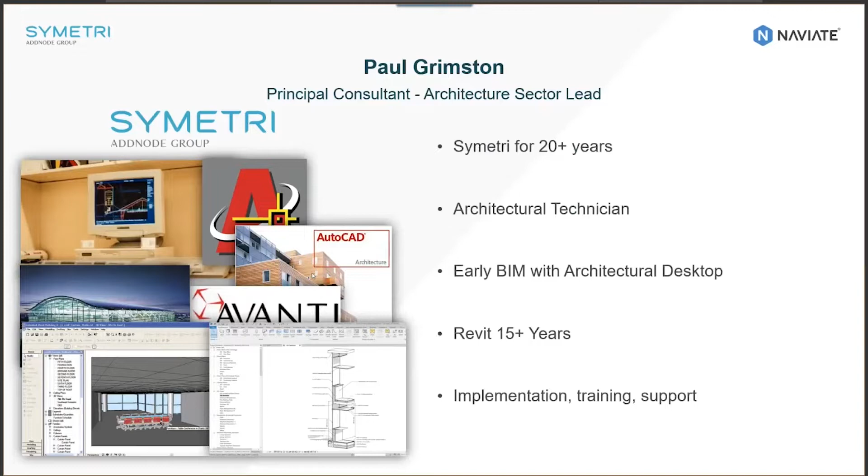The first area is everyday tasks, things that are just a little bit frustrating at times. Sometimes it's selecting objects or finding the right object on a complex project, trying to find the right family in the office library, searching through folders. That can take a bit of time - you know it's there, but just can't quite find it.

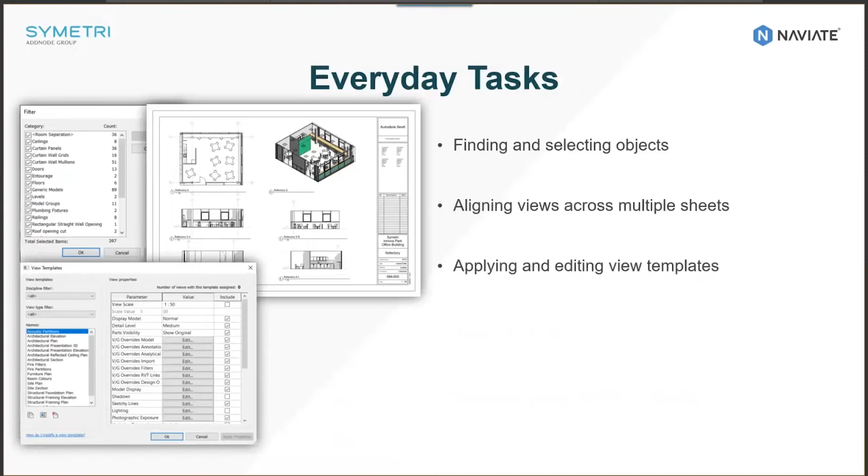There's other things like making drawings look presentable and consistent. We need to get views aligned across sheets so that they don't do that little jiggle thing in the PDF when you scroll through it. That's quite annoying. And things like assigning the right view templates - there's always hundreds of them in the projects, adjusting 3D sections, that sort of thing. These things can sometimes just be a little bit harder than they should be.

Some projects are just a bit complicated, and when you're doing this all day, every day, it can be a bit frustrating. Finding the best way to carry out these tasks can make a real difference to your everyday workload. If you can make it feel easier and give yourself more time for the things you actually want to be doing - designing and issuing the drawings - then it's really worthwhile investigating the options there.

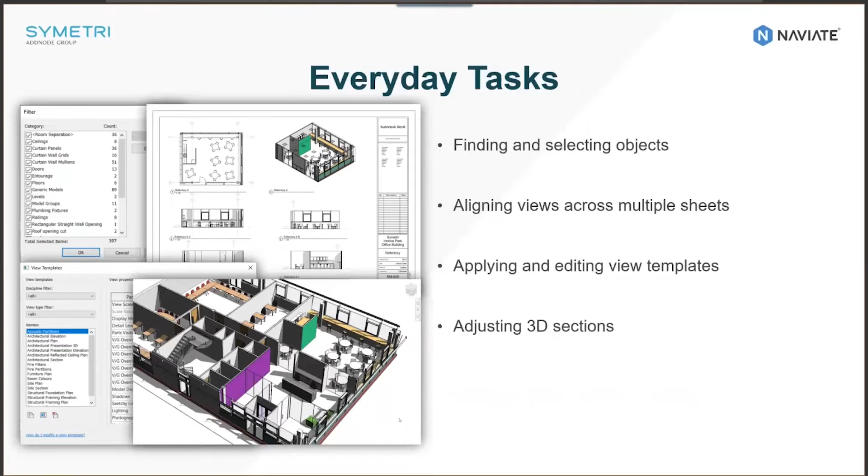The next group of challenges are things carried out on a regular basis, maybe weekly or fortnightly. The obvious one is issuing a set of drawings - having to go through each sheet individually and edit those revisions, ticking the box to make sure you've got the right one, the next one in the sequence, can be a bit time consuming.

One thing that has changed recently is printing sheets to PDFs with all of the correct naming convention - that has been improved in Revit 22 and onwards. But if you have to issue DWGs, Navisworks, IFCs too, that can take some time. And if you're still working on projects in Revit 21 and earlier, you're still spending a long time issuing those drawings.

When we do that, chances are we need to export out the model as well. Do we need to detach it, delete all of the views, all of the sheets, purge it? This is going to take some time, especially if there's multiple models that make up a project - that's going to take a while to go through them all. And all of this stuff always seems to be on a Friday afternoon. So having that workflow to fall back on, to know you're doing it the most efficient way, whether that means a Dynamo script for specific tasks or a plugin, can be a worthwhile investment.

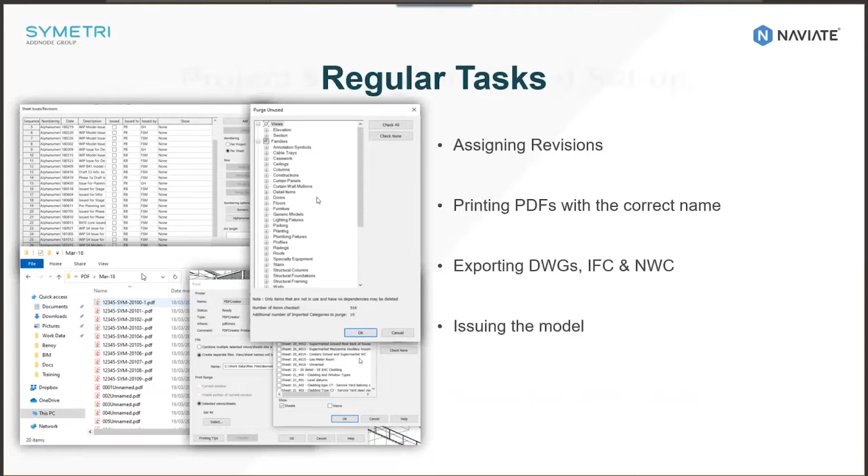The third type of issues are the project management and setup issues, and these things are a little bit more specific - there might only be certain people in the office that know how to do these things. We're thinking about controlling all of those view filters and setting up the view templates, going through all of the warnings - there's hundreds, if not thousands, that seem to creep into the projects - making sure we've got all of the right parameters set up there, all of the schedules are working.

This leads us on to things like numbering sequences. The first time you issue your door schedule or your room schedule, you're going to have to go through and renumber all of those objects. And if you need to combine levels and zones into the numbers, it's going to take a while to get through all of that.

Another one that I often get asked about is fill patterns - can we create a custom fill pattern for a specific material? This is always something that I feel like I have to relearn every time I need to do it.

We don't really expect every Revit user to be able to do these things. Not everyone wants to be an expert in Revit. There's normally a go-to person in a company that will sort this thing out, might even be you guys listening on the session today. It can be quite time consuming, a bit of a pain sometimes when you have to go through this.

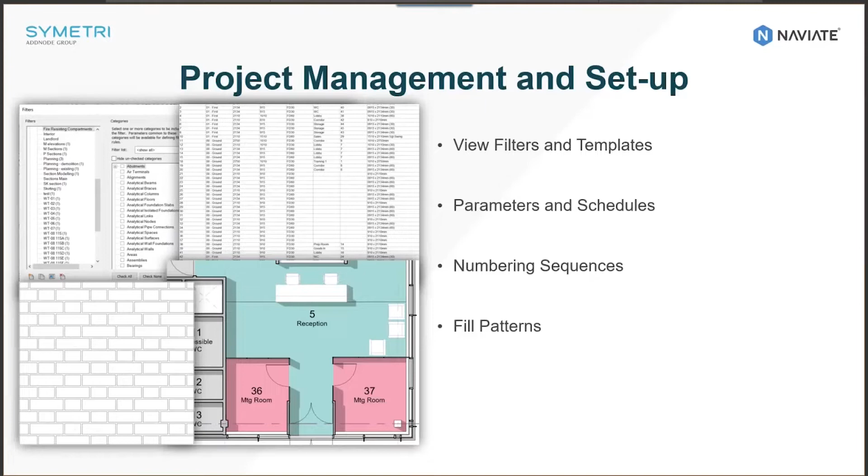And finally, we've got some bigger issues. These are the kind of workflow challenges, and these can almost stop projects from being viable at times, really.

We see a lot of residential work going on at the moment, blocks of apartments, and likelihood is you need to create a plan for each apartment in there. So you need to create a view, duplicate a view, edit the crop region so it fits around just that one apartment, get it all named, and put it on its own sheet, which again needs to be created and named. All these things aren't difficult to do, but if you've got hundreds of them, it could take days to go through.

It might be similar in education or healthcare projects. If you need to do room drawings, you're going to have at least 4 elevations, a plan, maybe a 3D view as well, and you probably want to put a schedule on there. And chances are, in a big healthcare or educational project, there could be thousands of rooms. That's a real nightmare when someone has to make a start on all of those drawings.

Other detailed bits - we see door and window drawings a lot, where we want that detailed elevation plan that we can put in with the door schedule, and there can be hundreds of those to go through, each one an individual little drawing that you've got to make up.

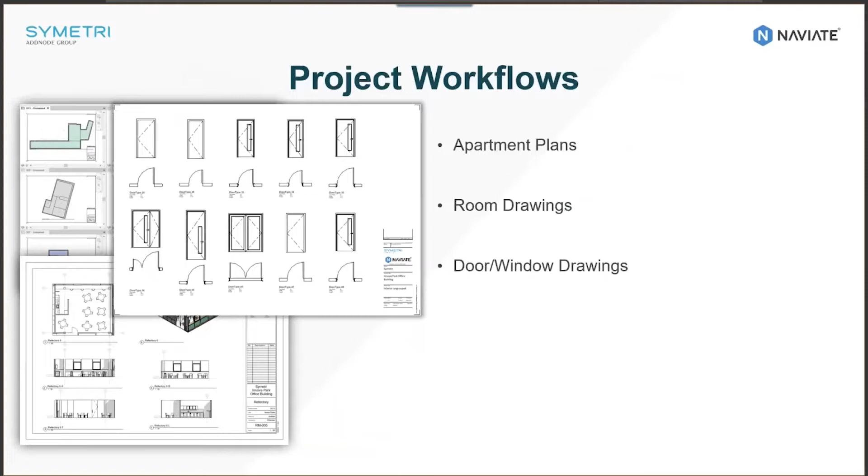Actually, what we're seeing a lot over the last few years has been a noticeable increase in the request to help organize data within models. COBie has become a really common deliverable, but also Uniclass coding, using SFG codes for asset management, and data for embodied carbon calculations is a common theme as well now.

Whilst there might be specific tools to help organize all of this, checking that it's all done correctly, that the parameters are filled in with the correct naming, or having to combine different parameters together to get the right syntax - that can really take a long time on a project. You really do need an easy way of managing that data and all of those parameters, and actually having a visual way to check that data makes it a much easier thing to do.

These kinds of tasks can be quite crucial to a project. They're a big overhead as well, so there may not be an easy way to carry out some of these things in Revit. You may be thinking that someone's just going to have to sit there and plow through it all - it may take days, if not weeks, going through it.

So therefore, getting a custom script or an app written could well be worth the investment if it's something you do regularly. Actually, this is kind of where my role comes in. I've worked with numerous clients going through these kinds of challenges, and everyone comes at it from a slightly different angle - they've all got their own requirements, so it's always interesting to see how we can work through the problems to suit that specific client.

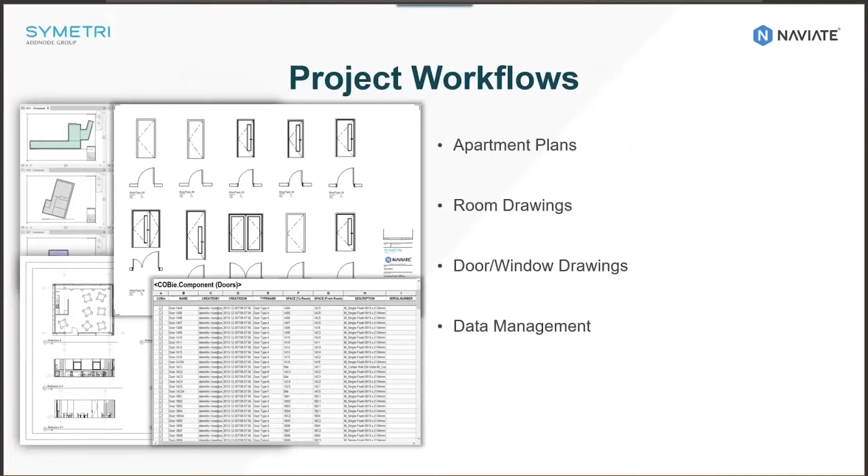It's got over 100 tools in there, actually, in the Accelerate and architecture ones that we're looking at, and they're all created from a need. They're there to help us work smarter in Revit, and it can have a big impact on the challenges that we face.

Seeing how a lot of these tools can be applied in combination to different workflows, it becomes a very powerful set of tools that we've got here, and could alleviate a huge amount of frustration in day-to-day tasks, but also in some of the bigger workflows. It could make some of those projects a bit more viable again.

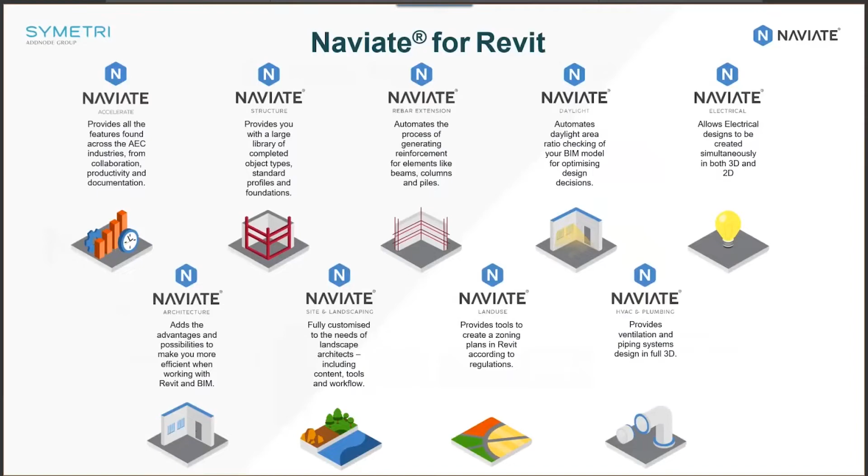So I'm not going to do a live presentation. I want to play this video, which I've been prepping over the last couple of weeks, and I'm going to talk over that and explain a little bit about what Naviate can do.

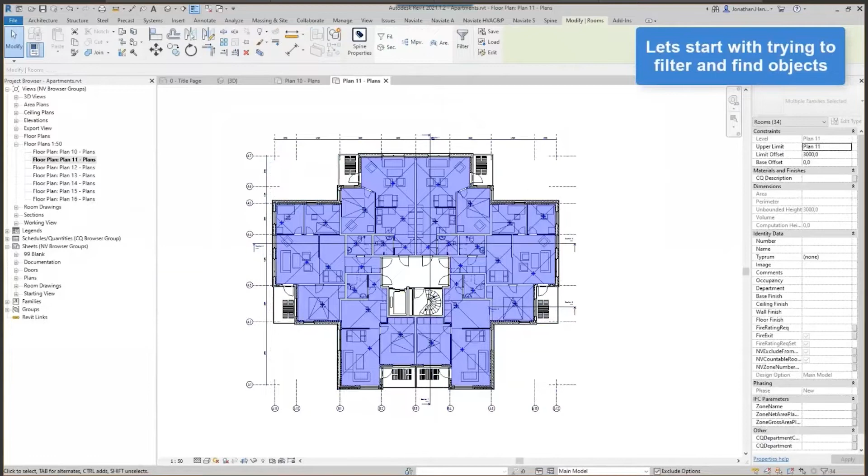We're going to look at some everyday tasks within Revit, and even things as simple as filtering in Revit sometimes are painful. You can see here in the example, I'm trying to filter by rooms, but I can only select the rooms as a category - I can't really filter in any more depth. But within Naviate, we've got a filter element tool, and this allows you to drill that little bit deeper when you need it.

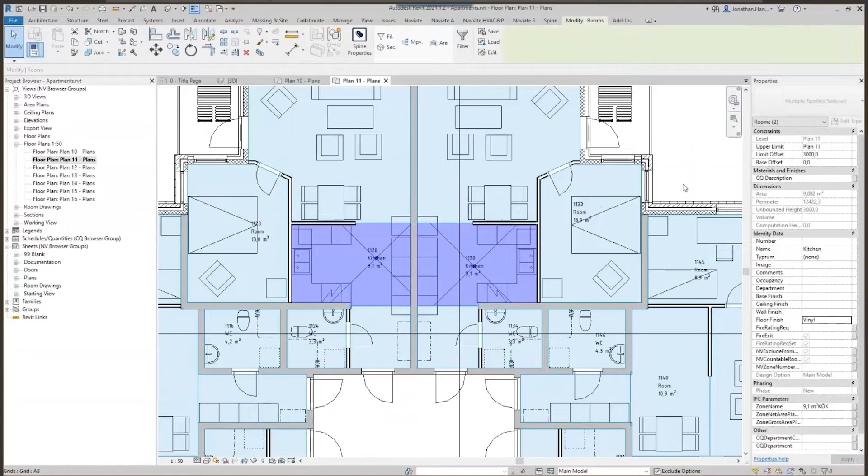So we can still select by category, but as soon as I select a category, I can also select the individual rooms. Once you have that, you can just click select elements. I've quickly gone into my model and selected and updated that piece of information within this instance, selected my kitchen, quickly applied a floor finish, and done that without actually selecting physical objects within the model. So it just makes it a little more streamlined.

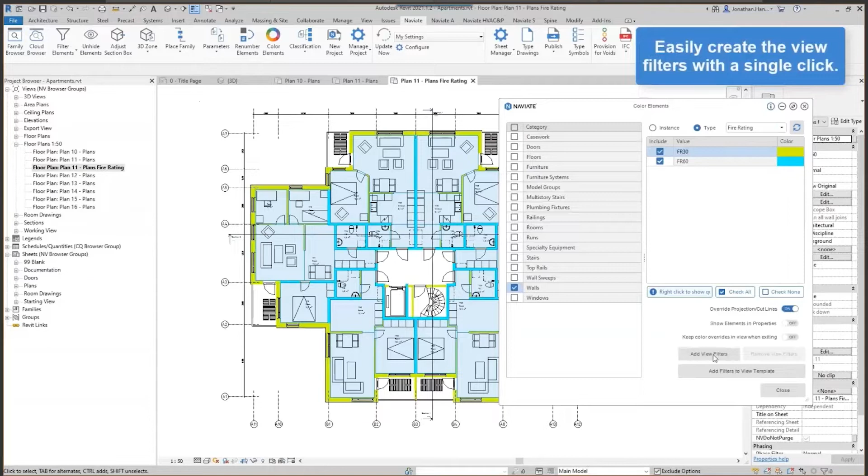One of our big tools is our color element tool. We use this to create things like fire rated floor plans. Here I can select a category, automatically select a parameter, and it builds the color scheme automatically for me. Then I've got options within the tool to create view filters. Just at the click of a button, I've gone in and created the view filters, so when I check my visibility graphics, you'll see the filters are now automatically configured and built within it. As Paul mentioned, these repetitive tasks aren't hard to do in Revit, but if you're doing them over and over again, it gets quite time consuming.

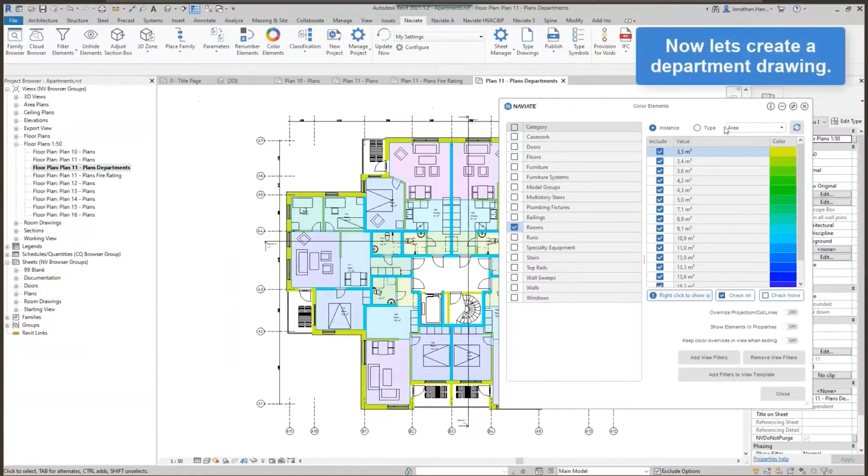Here I'm going to look at creating a departmental plan, which is often part of your deliverables. Again, I'll use the color element tool, look for the rooms, select the drop down and choose a department. You can see it already builds the color scheme. Again, I select and add the view filter, it filters it out, and then you can go into visibility graphics, and with the new controls in Revit from the last couple of years, you can enable and disable the filters. Within a couple of clicks, I've been able to build that directly.

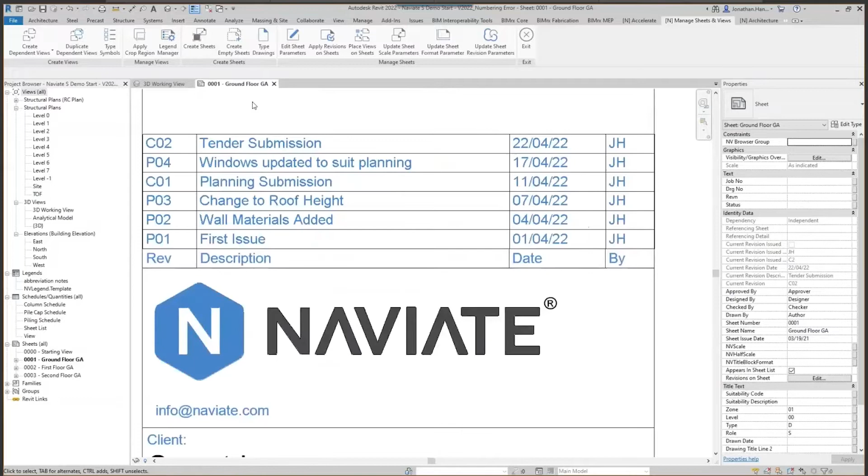As Paul mentioned in his presentation around revisions, this has always been problematic and very time consuming within Revit, since you have to apply a revision singly on each sheet. But within Naviate, I can select a range of sheets and apply a revision automatically to all of them at a single time. Here you can see I've added the P01 first issue, but I can go back in, select all my sheets again, select add revisions, and pick all the other revisions as necessary within my project. Here I'm applying 6 revisions to 3 sheets in a matter of seconds, so it really brings that speed element. On 5 or 6 sheets it's not a problem, but if you've got 100 sheets, it becomes a lot more time consuming.

Another thing Paul touched on was publishing, and yes it is improving in the latter versions of Revit, but still needs a little work. Within the Naviate tool, I can publish out to DWG, and I can configure naming conventions. Here I've got a sheet set already preset with a naming convention, and I've done this manually to show you how quickly I can configure the actual 19650 naming convention string I want to name my file, just going through picking my parameters that already exist within my project.

I add in the originator, then go to the zone, choose that and build it the way I want. I click in the level, and it's simply a case of picking your parameters and building that convention—it doesn't have to be 19650, if you've got your own independent one you can build it too. So you select the parameters you need, build them in, and on the right hand side I can add prefixes and suffixes. Once we've got the role, we add the sheet number, then add the hyphen that separates the naming convention, click OK, and it's built.

So now if I export the drawings out based on the sheet set, they'll have the correct file naming convention appended to it. Here I'm creating a catalog entry, so I can save this into the project, or save it from my settings, and we can also add in an IFC. So if you want to create an IFC export, you can configure that as well.

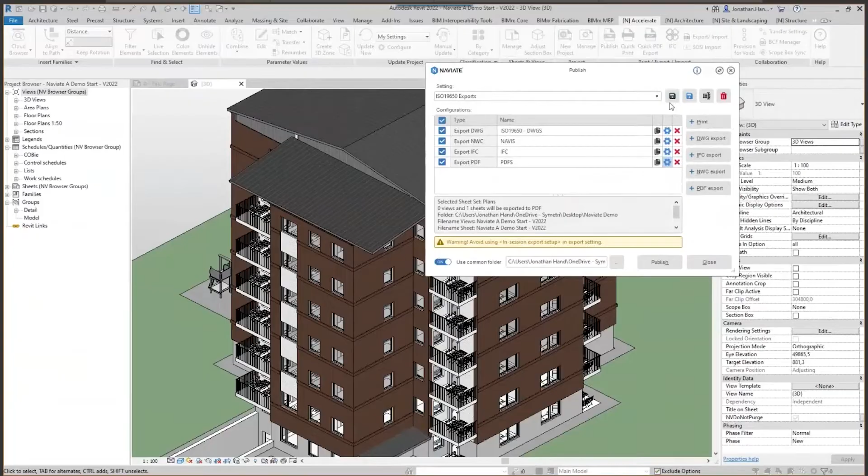One nice thing we can do is also use a common folder, so we can override the individual configuration folder location. So we can set a project location, and then you click publish, and then everything runs through the print publish routines and sends out the different drawings.

When we start looking at the challenges Paul discussed around managing projects and updating the data within it, we've got a renumber tool, which is really useful to renumber different elements.

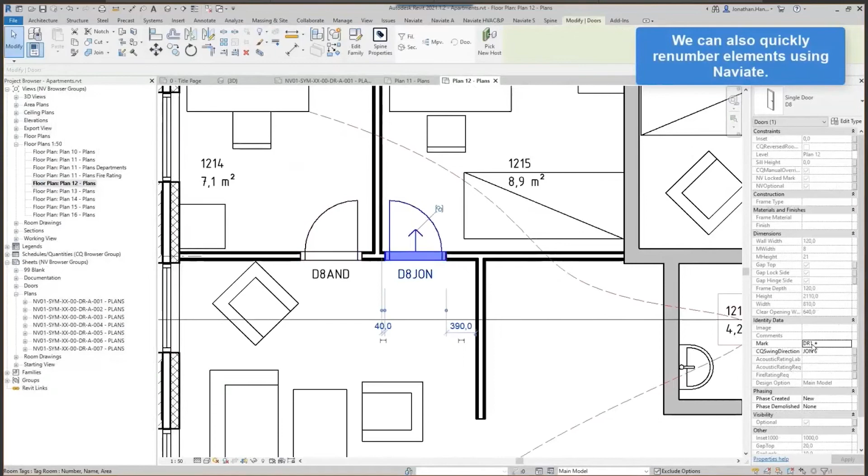Here I'm just selecting the doors, assigning a prefix, and selecting the object. You'll notice it's only looking for doors to be selected, so I'm not picking up other foreign objects that I don't want to renumber. I can select my door, and you can see the mark value is now updated to suit. It's a really quick way, and it's really useful for things like grids and levels.

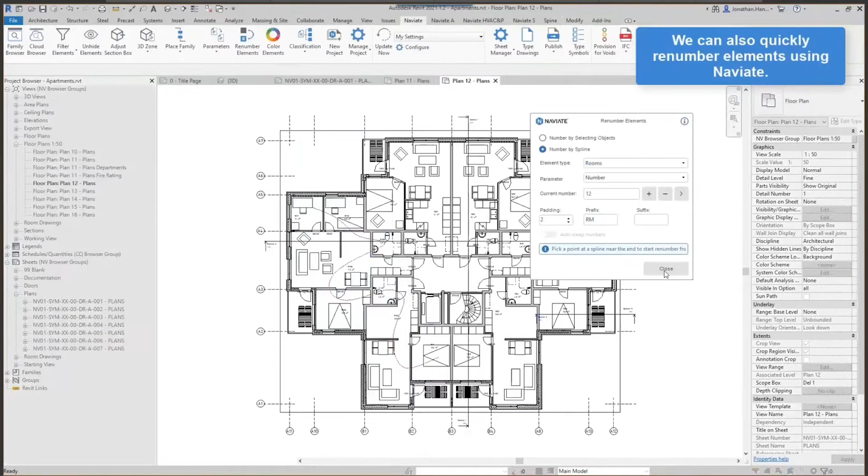Here I'm going to number by spline, so I'm going to renumber some rooms. Again, I can apply a prefix and current number, then pick my spline, and it will trace the path through, and I can reverse the order as necessary. Select OK, and I've just renumbered a series of rooms all in a single go. So I've numbered from 1 through 8, all done in a single click. Rather than these manual repetitive tasks, we can just go through and do all of that.

As Paul mentioned, you may be required to strip out a model or purge it. Naviate has a tool already preset that we can configure via the dialog box and options to easily create this.

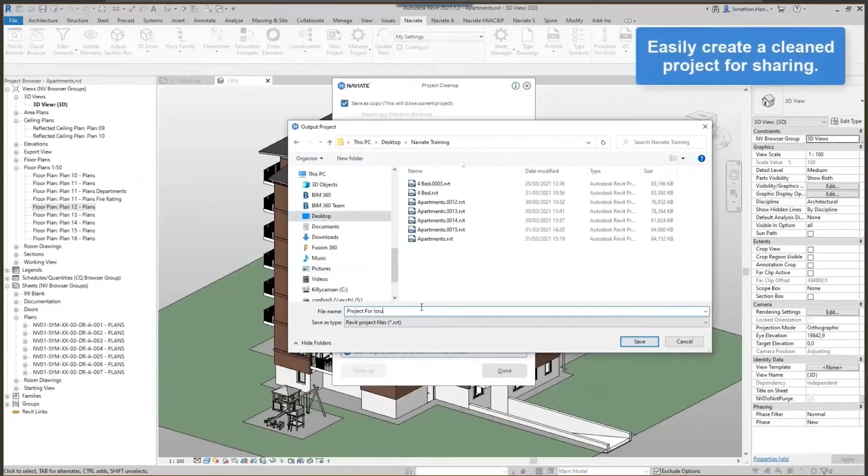So here I'm creating a project for issue file, and what it does is effectively save your project, and then using the options on screen, you can see I can delete the sheets, the model views, take off CAD imports, images, scope boxes, any unused view templates, and configure the options depending on what you want to effectively strip from the file.

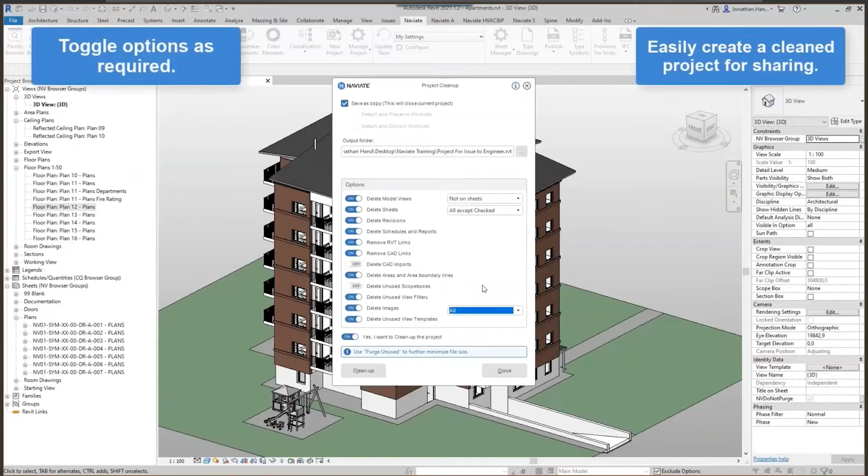You say, yes, I want to clean up the project, then you can simply go clean up. Naviate will allow you to keep working on your work-in-progress model, but then save out this cleaned model.

Another big area we look at is manipulation of the data and editing parameters. Depending on what you're doing, I can select all the type parameters for all my walls, and it brings it into this Excel-type matrix, which gives you the freedom to manipulate and edit the data. We've got ranges of controls in here to drag and drop.

Here I can add in some values for the mark, update it, and then drag the cell right down through all the values using a fill increment value where it automatically updates. If I want to put in some more descriptions, I can write that Naviate is great, then use copy and drag that information right down. So it's a really quick way to manipulate the data.

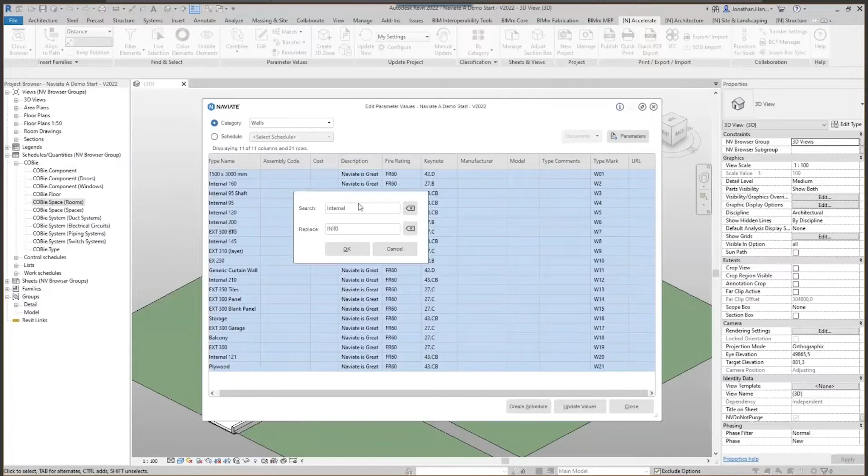What I can also do is find, search and replace. So I can search for particular values. Here I want to search for 'internal', and I'm renaming the actual type names here, so I'm going to type 'internal dash', click OK, and we've updated all the type names for those families. We then go update values, and it writes that information directly back into the model. You can see I've updated 57 parameters in a single go.

We also have the ability to update and modify schedules. You can select the schedule button. Here I'm loading in a COBie schedule, which we all know will be problematic in checking and updating that data.

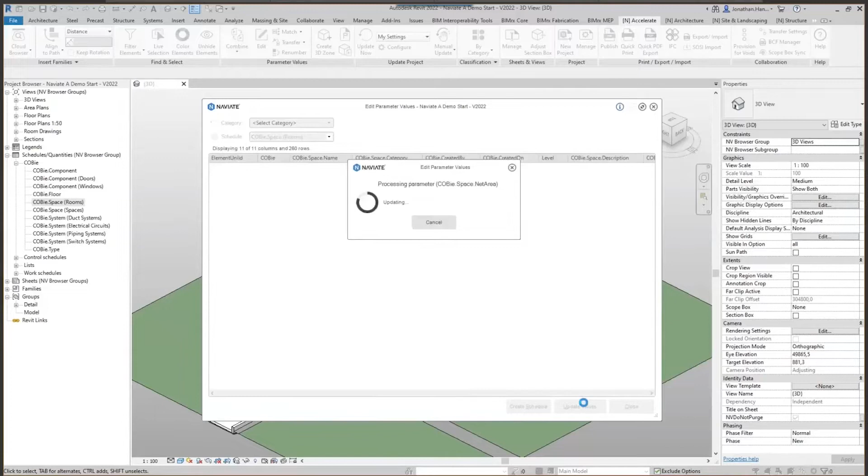The same principle exists where I can just drag that information down within the cell, and use the various options under the fill increment. You can see I've just updated all that information. So it becomes a go-to place to update, modify, and change all the metadata within your project. There, 71 have been updated in a matter of seconds.

When we look at the advanced side of things, we also have the ability to combine parameter data. This allows us to lift existing parameters from our categories. I can select a window, choose some type parameters. Here's an example where I take the rough height and width, building a new parameter within my project, and get Naviate to populate that into a new parameter destination.

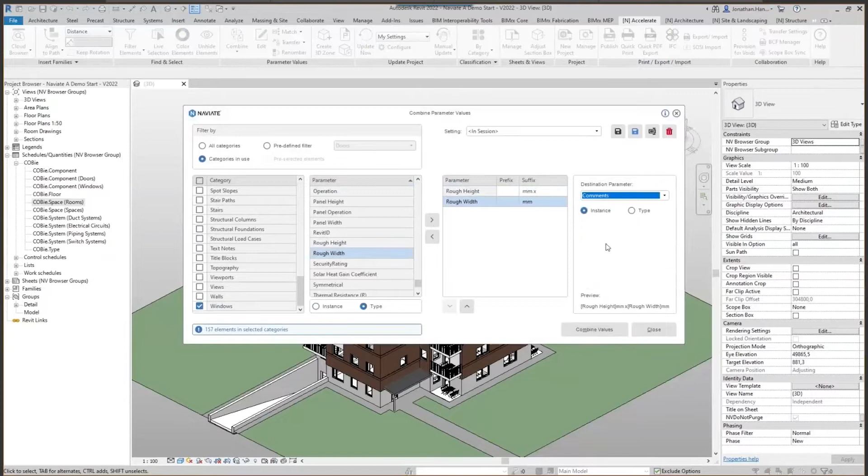In this instance, I've taken my windows and combined it into the comments section, and in one second I've updated 157 windows. You'll see that comment section now has my new combined parameter.

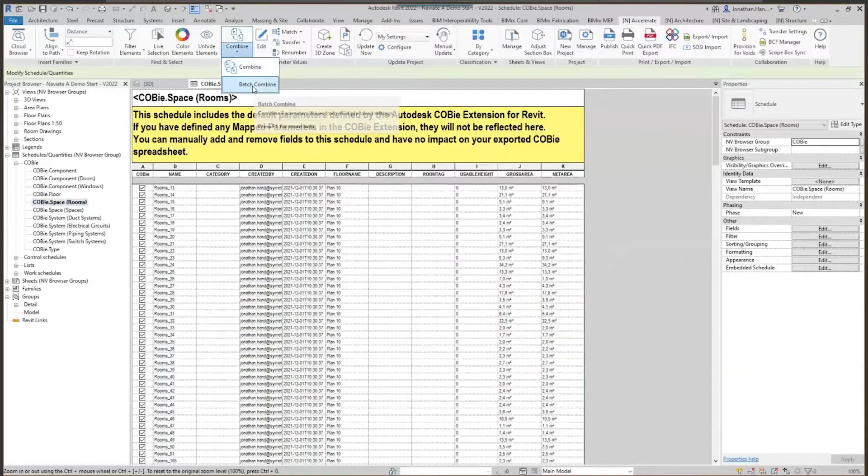In a practical example, especially around this COBie problem Paul mentioned that we're now required to do, I can use the Combine feature with some pre-configured routines. I've taken the space description, the room tag, and the usable height, using that Combine feature in a batch sequence to update 260 parameters in seconds. You can see the description, room tag, and usable height have now all been populated with new parameter information.

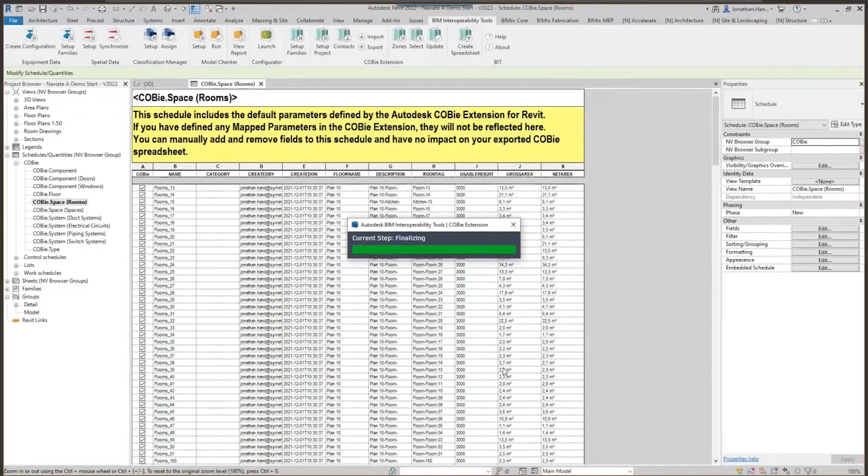So when I go back to my interoperability toolkit, I look at creating the spreadsheet and exporting that out into Excel. You'll see that the updated information has now been embedded into that COBie workflow. Now when we look at the Excel sheet and open the file, you'll see that information.

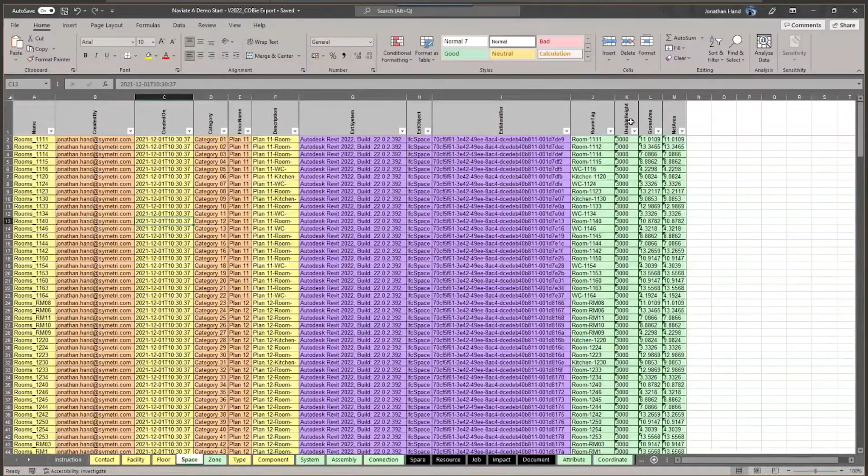The information I concatenated around now exists within that Excel file. So bringing that type of automation and speed into how you can modify and manipulate your information just makes it an extremely powerful tool.

Then we look at some project specific workflows where you may be required to create room data sheets. This is probably one of the big ticket items in Naviate — a big time saver, allowing me to create my elevations, my plan view, my 3D view, and also create RCPs as well.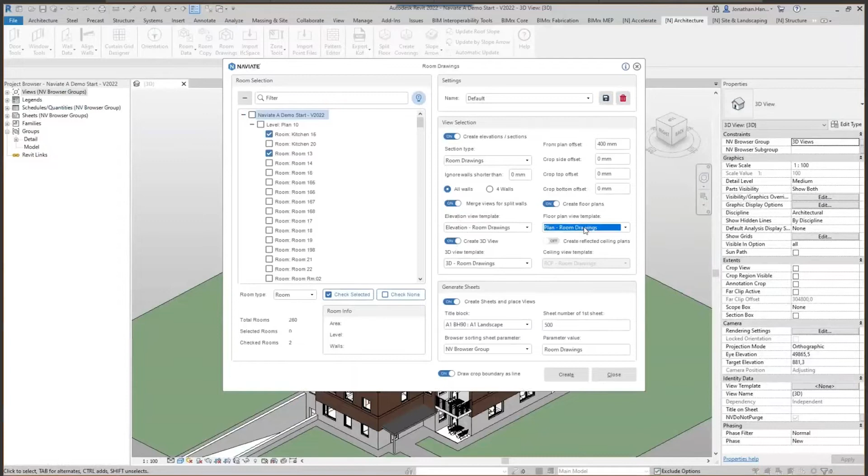It's going to create these views, crop them, apply a view template, but it's also going to create the sheet and place the views on the sheet for me. So for those of you required to do this for 1 room or 10 rooms, it's not that bad. For 300 rooms, you best book off the rest of the week to find the time to do that manual repetitive task.

Naviate is just automating what you have to do manually in Revit — taking our views and placing them onto the sheets. We've got customers saving thousands and thousands of hours a year using this tool.

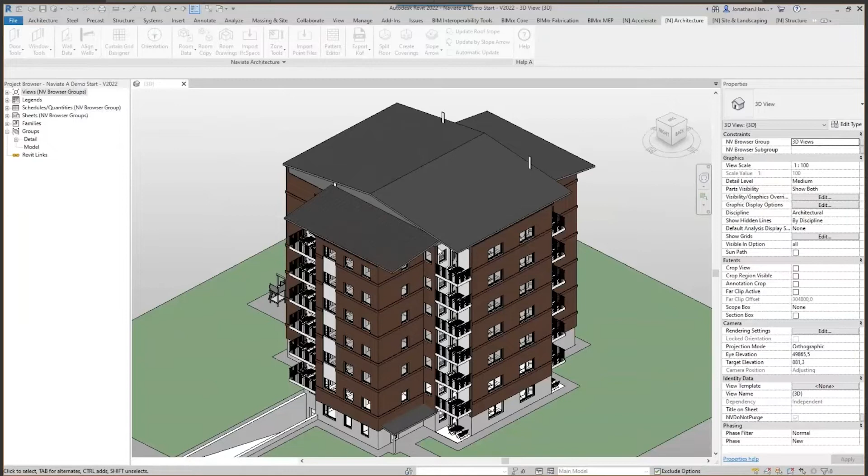When we go in and look at the sheet, we can look at the kitchen drawing that's just been generated, and you can see it's placed my elevation views. With view templates, you can set them up however you want. I've got my plan view, and then also my 3D view as well.

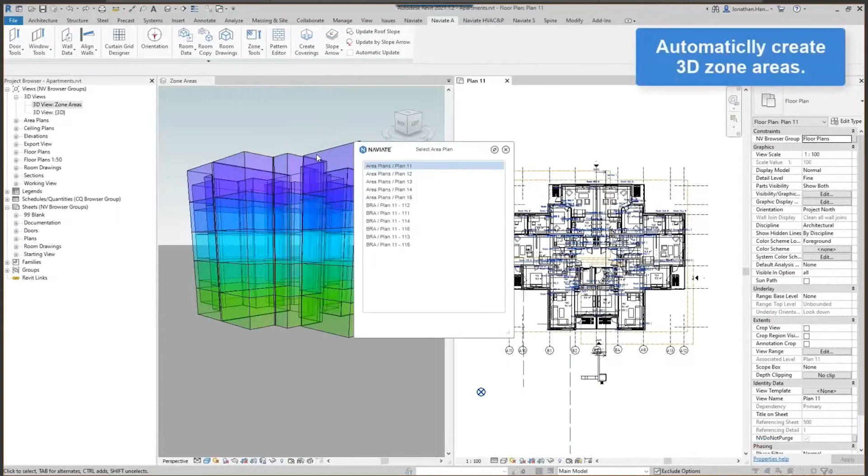Another area we're starting to see a lot of traction with is early stage design development, looking at areas and volumes of habitable space. We've got tools around zoning, and we can automatically create 3D zones from areas. In this example on the left hand side I've got my 3D zones, and because I've got an area plan, I can get Naviate to automatically create them as model elements, so I can start to look at these zones in terms of what they look like in volume and area and how they can be used.

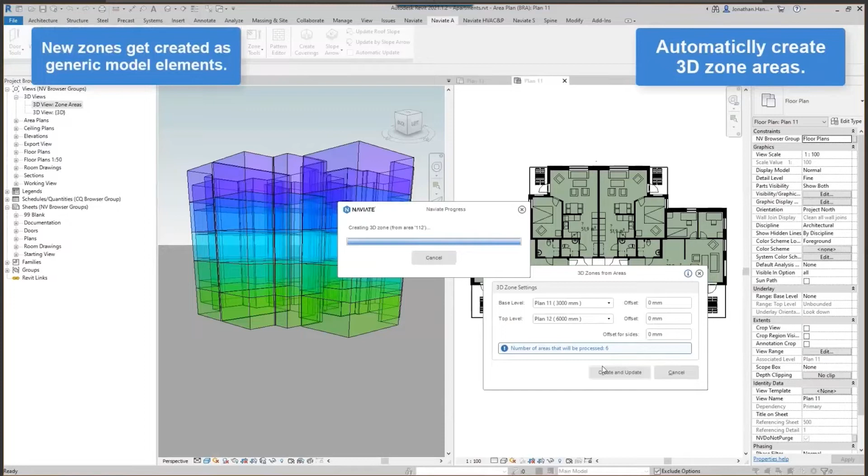And you can see now it will just add these zones directly into the 3D model to give you that early stage stuff. So we're starting to see a lot of traction around this type of work, and this very early stage in design analysis.

Another big workflow is door drawings, as Paul showed. It's becoming more and more of a deliverable, and within Naviate, we've built a system which automates the production of all your door drawings.

So here I can pick from schedules, or I can pick all the door types, or I can choose individual doors within my project. Then it's a simple case of going through and building the view selection — do we want to create some elevations, plans? It will also tag, schedule and dimension these individual views, completing that complete workflow.

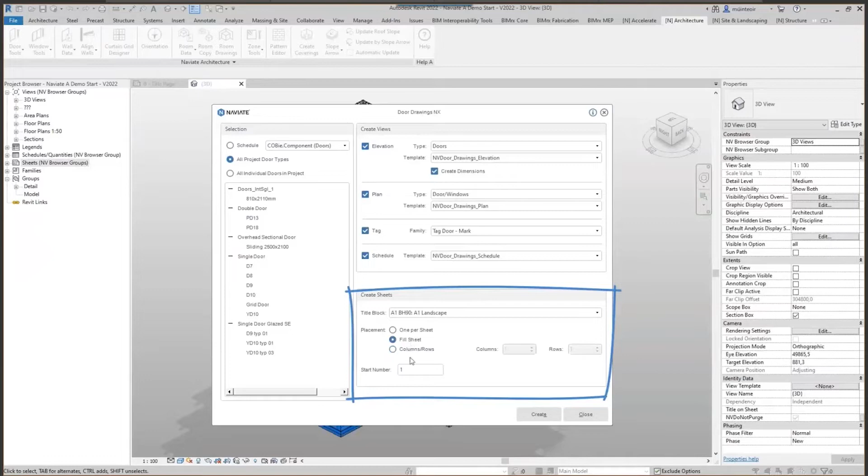And with everything in Naviate, if we are creating the views, we may as well put them onto a sheet, and we've got options for how we want them to be placed. You can do them one per sheet if you wish — I tend to fill it onto a sheet, or you can specify the number of rows and columns you want on a sheet. It's all configured from within a single dialog box, as you wish.

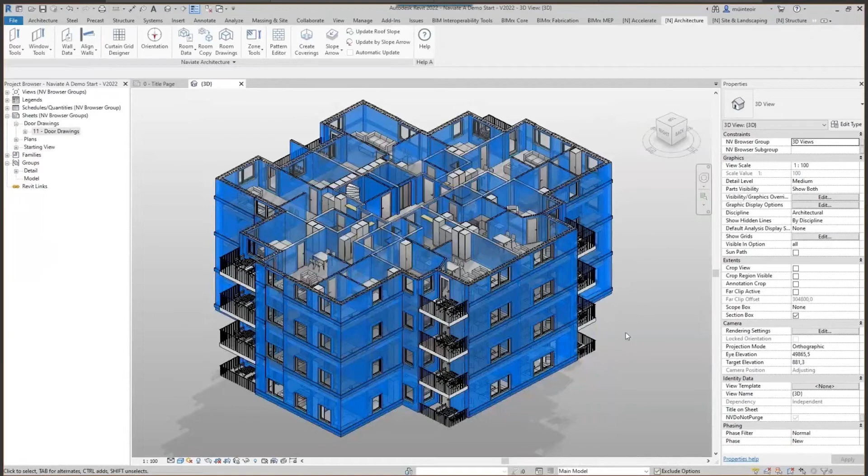Then we click the create button, and that automates the manual process of going in, creating the elevation or sectional views, or even doing it by a legend, applying the crop region, applying the view template, creating the sheet, and placing the views onto it. When we look at the drawing that Naviate has produced, we can see we've just automated that complete process. So if you have that requirement, we've automated it completely within Naviate.

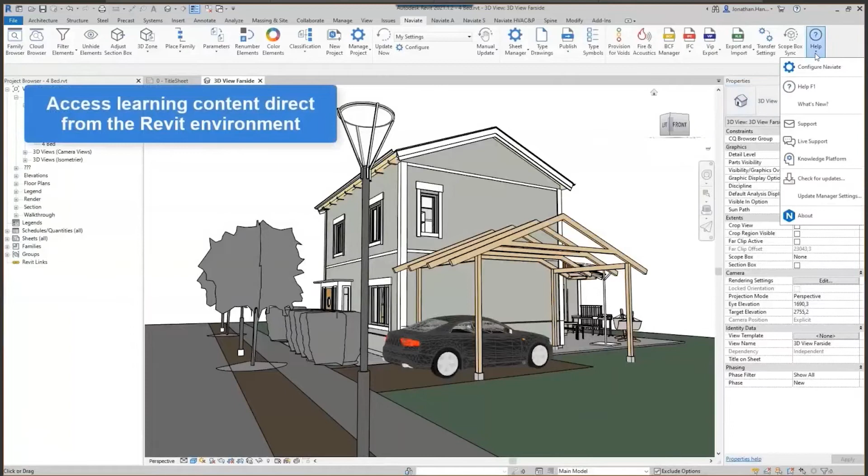The last bit I want to touch on is the learning element — it's a key part of us moving forward. Naviate comes embedded with a knowledge platform, which we tend to call learning on demand, so you can just consume it when you want. It's a window which pops open within Revit, so you're still within the system.

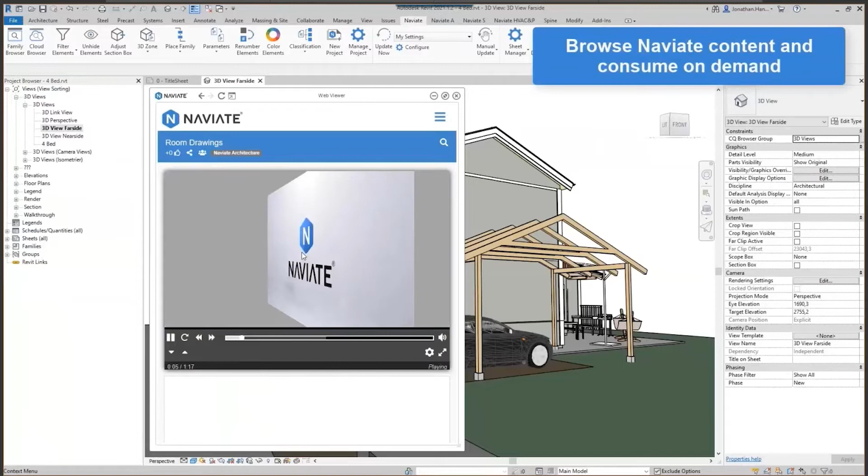Here we can choose some of the Naviate content and select a video. Say we want to know how to do a particular task but haven't done it before — I've just shown you how to do the room drawings, and this little video is 1 minute 17 seconds. So even if you've never run the tool before, or haven't read the help file or had training, you can go into the knowledge platform at any point, review the video, and select the different options.

It's a very quick, easy way to learn on demand when you need it, when you've got that project requirement and haven't got time. Especially now in these pandemic times, where you may not be in the office and may not have that shoulder to tap and ask for help, this is where this learning content comes into its own. It's been hugely successful for us in giving that blended learning back — click it on demand, review the simple video.

Most videos for individual tools are 1 to 2 minutes, so you don't need to be in it for hours — you just click in when you need to, and it shows you how to run that particular tool.

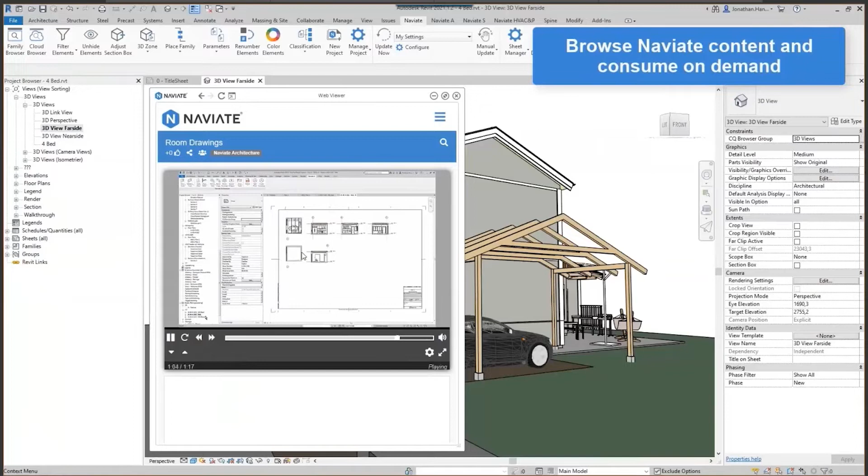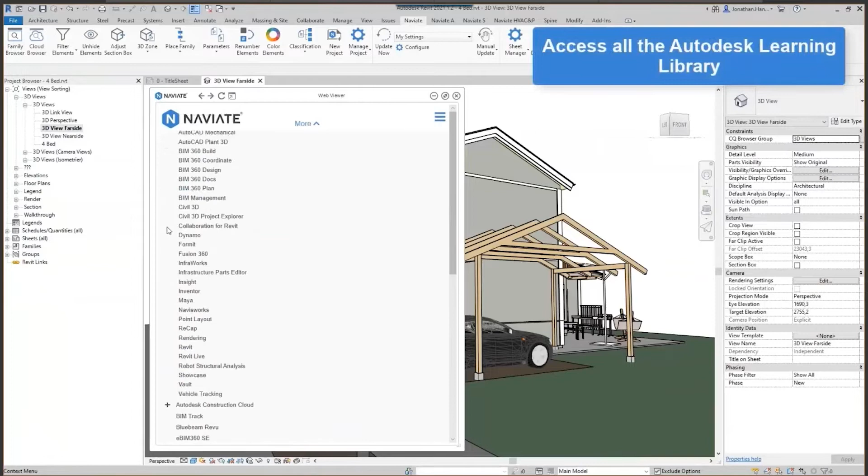In this example, I'm clicking into the sheets, and you can see a simplified version of the room drawings I showed you previously. That's the learning content there, which runs through — even played at full length it only takes a minute. We also come with the full library of content, so you can click the navigation tools and go back through it. It comes with the whole Autodesk library of content, so if you want to upskill on Revit, you can click into the Revit library.

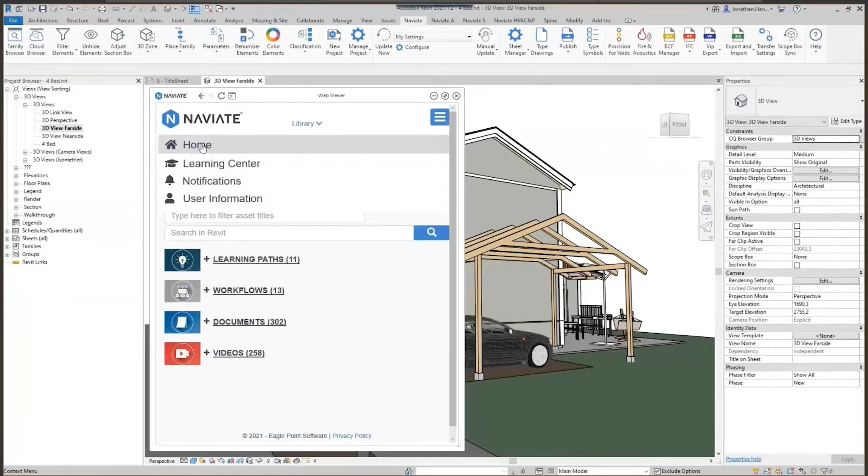It will have all the different versions, learning paths, years and workflows, and all that information. It's all very similar to what you've just seen. You've also got a range of documents, so instead of Googling, you can just go into here and click into your library to review that content as you want.

There's also a hugely intelligent search engine, so you can click a search term for what you're looking for, and it will return all the applicable information. In this instance, I want to know how to use a slope arrow, something I may not have used before, and I can then click play.

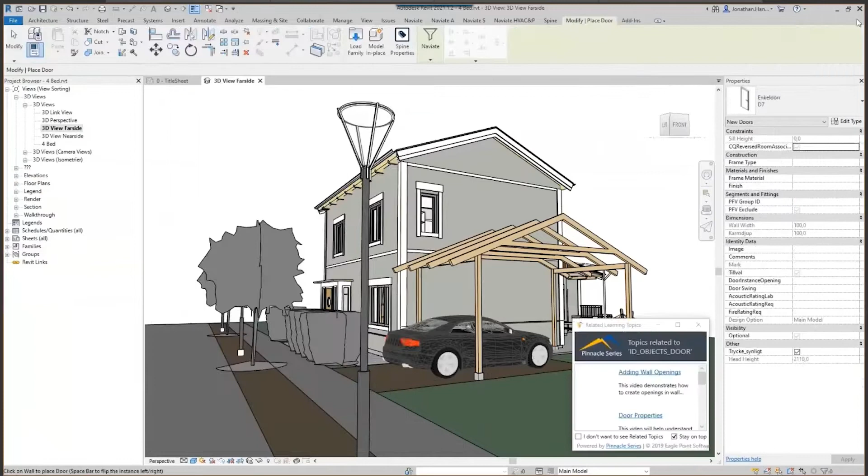What we also come with is a related learning panel, and this is really good to have on at the very start of your Naviate and Revit journey. It's a little panel that looks at the commands you're picking in the project, and shows you applicable learning content for the tool you've just picked. So even if you're brand new, you can have this related learnings panel there for you.

So that hopefully covers, in a bit of a whirlwind, about 19 minutes, what Naviate has to offer. What I also want to cover before we get to the Q&A, which is a very big part of what Naviate is about, is our development and community. Naviate wouldn't exist without our community - everyone that helps with the development, the ideas, and the conversations that we have to make Naviate better.